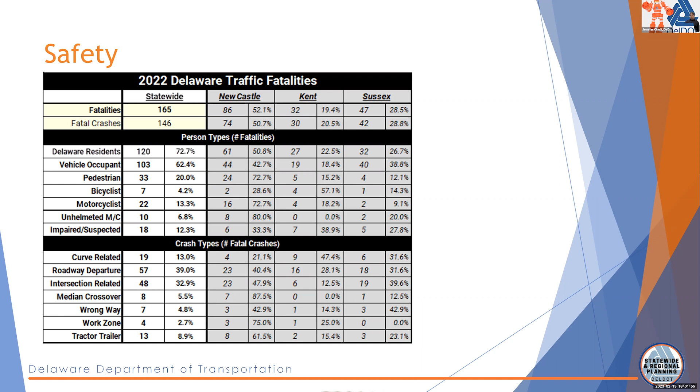Next slide. So, oh, we don't have updated ones. It's summer 2022, I think we saw this last time, so let's go ahead to the next one. Oh, this is the map. Okay, so 165 fatalities in 2022.

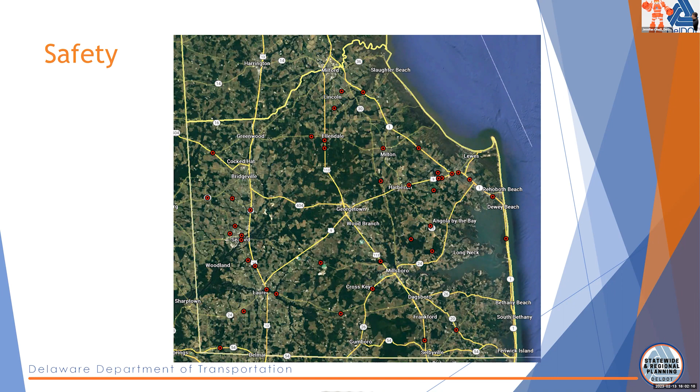As you can see, we have the segment that we're discussing tonight, which is Route 9 between 113 and SR1. Some clusters of fatalities in that area. So heartbreaking, it's really getting worse. 2023 already we have 11 fatalities.

It's starting to hit closer to home for me. I'm getting notifications of friends and families that have lost loved ones. Milton lost a young person due to speeding on a bad curve in the road. It's tragic. So please, seatbelts, tell people to stop speeding. No one's life is worth having to get there faster. I still can't understand that concept. I just get out of everybody's way because I'd rather just get there alive.

So am I done? Yeah, so that was Andrew's turn. And I wanted to throw in real quick something of note: I really want to thank you for being here, especially for those Eagles fans from last night. Sorry for your loss, it was a really good game, maybe next year. So, Andrew. Wow, that's my lead in.

Go Birds, appreciate that. But just following up on what Jen said regarding safety, when we bring a group like this together, spend some time with you, create these working groups, these committees, whatever you want to call them, they do serve as a conduit for us to get the word out to the people. We can only do so much just us talking, but we feel like by the fact that there's 10, 15 of you here, that message spreads regarding safety. So that's one of the reasons we like to do this. We hope you'll pass that along to anyone you might know.

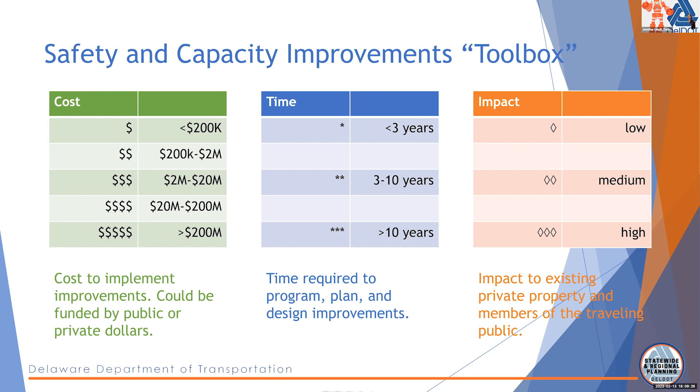So you're well aware of those impacts. As we went through our toolbox last month, we talked about how different improvement types have different costs.

At the network level, we could build an entirely new road, and that could really help alleviate a lot of congestion issues, but it's going to take a lot of time, be very expensive, and have a lot of impacts to private property owners. You all get the idea.

So these are our network level improvements: new roadway, new interchange or grade-separated intersection, similar to what is being constructed out on 1 and 16 right now. You could realign a roadway. Some of those projects we'll be hearing about a little bit later, where you can align, especially an intersection, for improved flow.

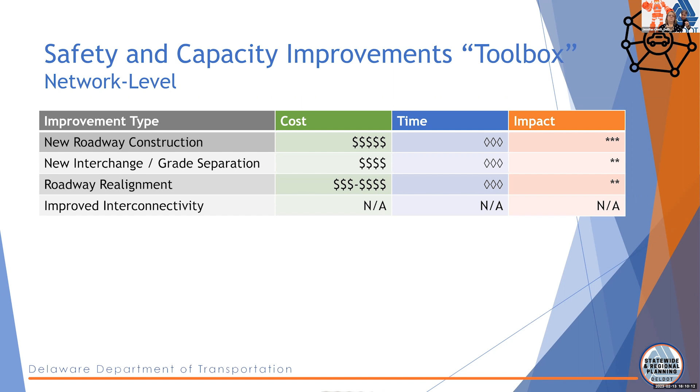And just broadly improving interconnectivity. We talked about that last time as well, especially interconnectivity for people who are traveling maybe by bike or by foot, as well as by car.

So at the roadway level, one of the top things we look at is widening a road. You can take a road that is currently 2 lanes and look at a 3 or 4 lane section. That is really something we're going to be getting into this evening a little bit with 9.

As many of you are aware, the department is starting to widen 9, close to 1. So how far that widening needs to happen is something we really would like to talk with you all this evening.

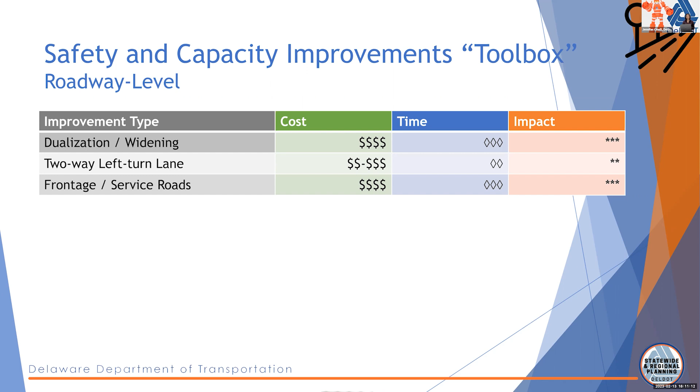So again, those are some of our roadway improvements. Lastly, at the intersection level, there are actually a lot of really quick and efficient ways we can improve safety and capacity, things like adding a right-hand turn lane.

So instead of someone slowing down in front of you to make a right, they can actually get out of the way and allow free flow traffic to move forward. Same with left turn lanes. And of course, things like all-way stops when necessary to allow cars to get across the roadway.

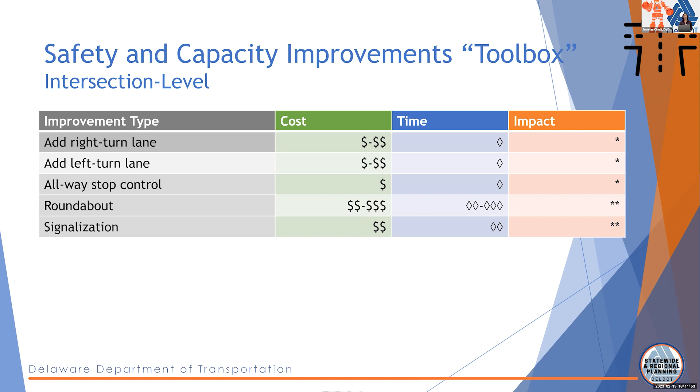Roundabouts, I'm sure we all have lots of opinions about those, but it's definitely a tool that improves safety. And also signalization. So these are, when we look at a corridor, our tools in our toolbox that we look at. As we walk through Route 9 this evening, we can keep all of those things in mind.

So with that, Steve's going to talk a little bit about some of the traffic issues on 9 right now. Give my standard update, I apologize. I'm just a little hoarse getting over a cold, but I'll do my best here to project.

So looking at, as we started on 16, we'll look at the AADT traffic, starting with sort of the base estimates from the DelDOT volume summary, right around 15,000. Taking extra data, recent data from counts and from the StreetLight big data software, we've honed in a little bit those numbers, a little bit less on the Georgetown Harbeson area.

However, we have reason to think that those might have been impacted in 2021 by the ongoing construction at Sand Hill Road and Airport Road. So we're sort of willing to say that it's probably around 15,000 per day demand, no real significant adjustments to the DelDOT volume summary there.

One big difference here is that the seasonal factor is only about 5 or 10% extra traffic over that 15,000 in the summer, whereas on 16, remember, it was up around 30% increase to the daily traffic in the summer.

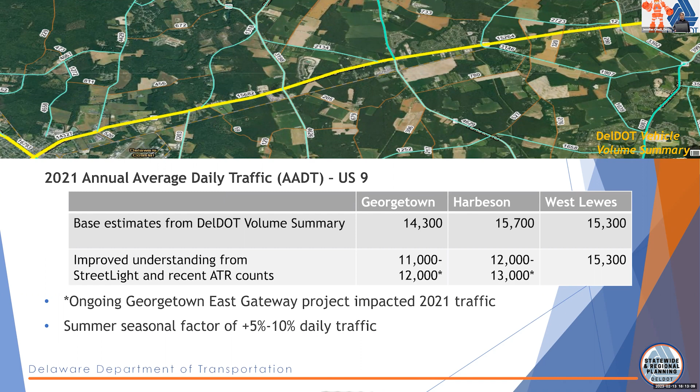A couple quick checks of the origin destination data, again, to sort of compare to 16, show how this corridor is a little different, make sure we're all on the same page with that.

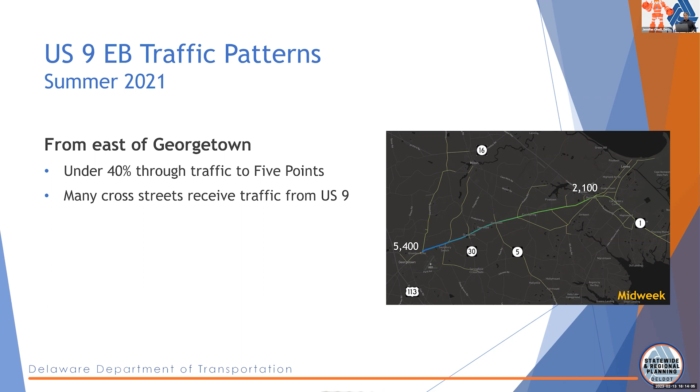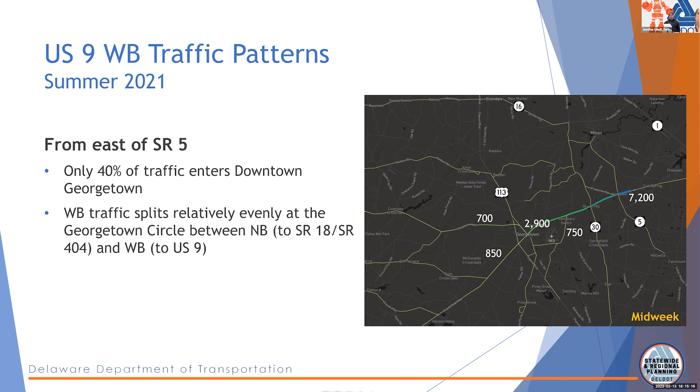So just the general traffic patterns there - this is not a through corridor. There are people destined for places along US 9, for the towns and side streets along US 9.

So again, basic summary: we're talking 15,000 vehicles daily, which is more than we were talking last month on 16 - or 50% more. Thankfully, the increase in the summer is not as much as we saw in 16, but it's still something notable - still a little bit worse in the summer.

And with growth and development, we're going to be looking at daily volumes approaching 20,000, which again, from the first meeting, is sort of the common threshold we used as we might start to need to consider dualization. That's based on a lot of other factors and analysis too, but it's a threshold to keep in mind.

The other thing we're going to go through, as we bury more of this analysis into the west-to-east travel, is that the signalized intersections are essentially built out here. Think back to 16, where you have 30 and Route 5 with basically no turn lanes - they're two-phase signals. We'll show you aerials - every signal along US 9 has left turn lanes, has bike lanes, on all approaches.

It's not just along US 9 - most of them have right turn lanes too. So some of those toolbox items where we could consider improvements, like what we're considering on 16, maybe improving some of those signals in different ways - they're not really an option here. They've already been done on US 9.

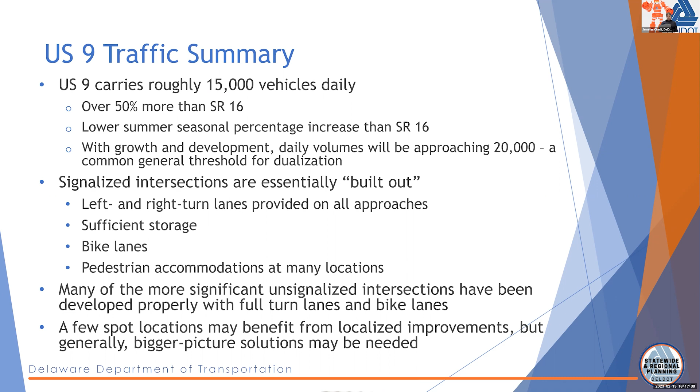And to get into this, we did some further analysis on these intersections that we didn't show you on 16. I'm not going to read all of it - there's a couple of slides here for your own reference, but it talks about level of service and how DOT planning uses that to figure out what needs to be done, or to rank alternatives. We assign it a letter, A through F - most of you've probably seen that. Obviously you don't want to be F - F is your overcapacity, delay is horrible.

But what else did it say? There are other important traffic performance measures we want to pay attention to as well, like delay, queuing, and bike level of stress, which is new but big in the department these days.

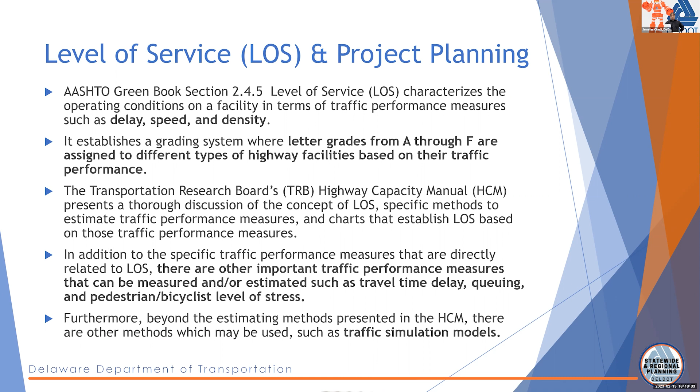Closely related to capacity, volume over capacity over one is generally LOS F. We try to stay away from E, but it's not necessarily going to tank a project if it's the worst case peak.

I think historically, when we bring level of service data to members of the general public, there's a phenomenon where we all react like, ooh, I don't want to see that on paper. It's just a very intuitive reaction to levels C, D, and E. And I apologize for not saying this.

So if we can come up with a graphic - yeah, FHWA has a really great graphic, because when you hear F, you automatically think it's a failing grade. But when you see the number of cars and what that volume looks like, it's not quite what you think. Let me see if I can retrieve that, just so that'll help inform where we want to be.

And on these slides, we bring in delay, average delay in seconds, which can help paint the picture a little bit clearer, where you can say okay, I'm at level of service C, but I wait half a minute on average at this signal. That's not going to ruin my day, versus something that's 60, 70, 80 seconds delay on average for every car.

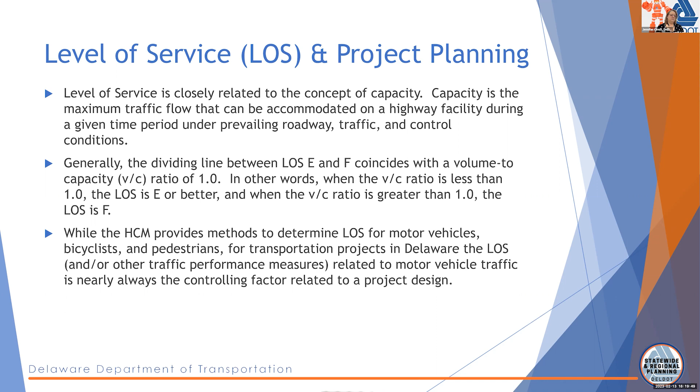And then some more notes for your reference. So, starting our travel across the US 9 corridor, Georgetown area - one of the first things you notice about Georgetown is a lot of ongoing, completed, and planned CTP projects. So we'll give you a brief rundown on what's been done, what's happening, and what's coming on and around Georgetown.

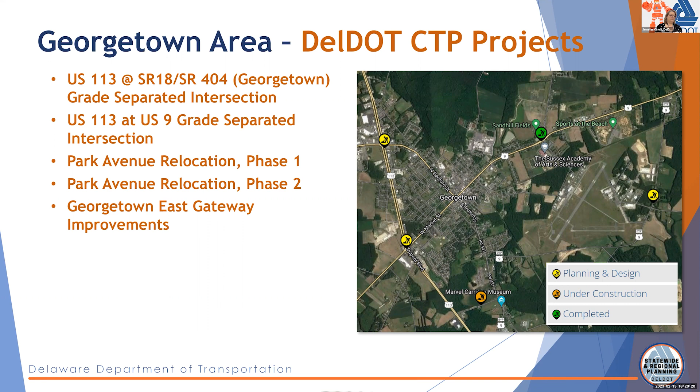First one is the 113 at 18/404 grade separated intersection. I think a lot of you are probably familiar with this. It's nearing construction starting - still technically in design and planning, but those plans are nearing completion and we're targeting a 2024 construction start. It'll be a 2 to 3 year project. So that's a big one.

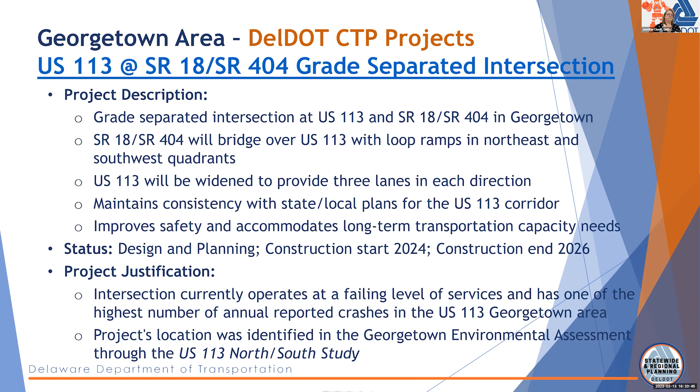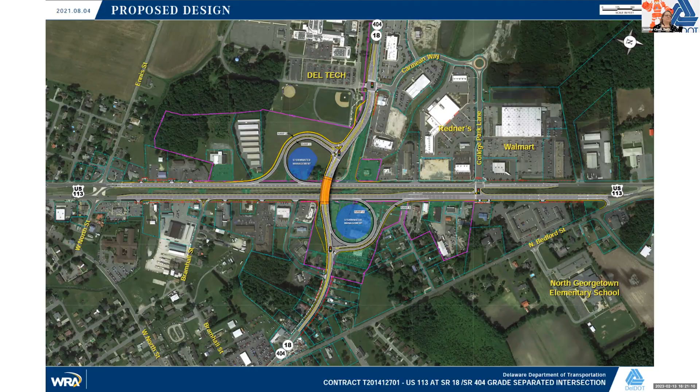Also a grade separation plan slightly farther out in the future at 113 at 9, still in the earlier stage of design and planning. These are all safety justifications - we've seen crashes at these for many years. They've been hazard elimination program sites, and they've been a thorn in many departments' side, and DelDOT's side.

And they've also been identified through the long-term 113 north-south study. So this is just a schematic of the current plan for the 113 and 9 grade separation - one standard loop and slip ramp, and then 9 under 113 with a more diamond interchange on the south of this picture.

Yeah, sorry, I know my voice is - you get to stop now.

Okay, yeah. So obviously the other piece of the picture we want to consider is incoming development. And last month we had really valuable input from you all on incoming development. So we're going to walk through some projects that we are aware of. Jocelyn, you may have some more current updates and we'd love to hear from you on those. So I'll read through the slide and if you want to fill in any blanks, you're welcome to.

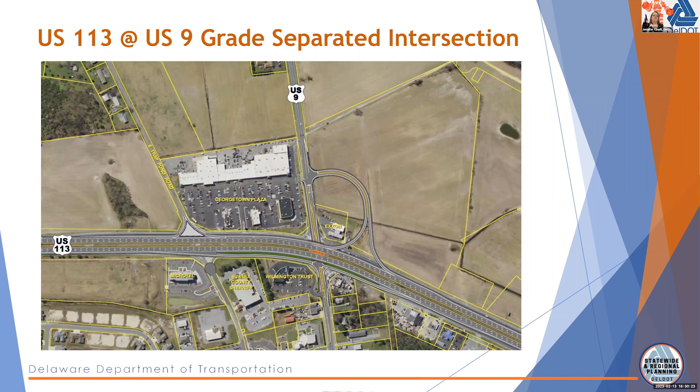Is the Oaks development getting access to 113? It doesn't look like it from the image. I'd say probably not if it's a protected corridor. No, it's off of Airport Road or South Lake. There you go, that's isolated, it's not open.

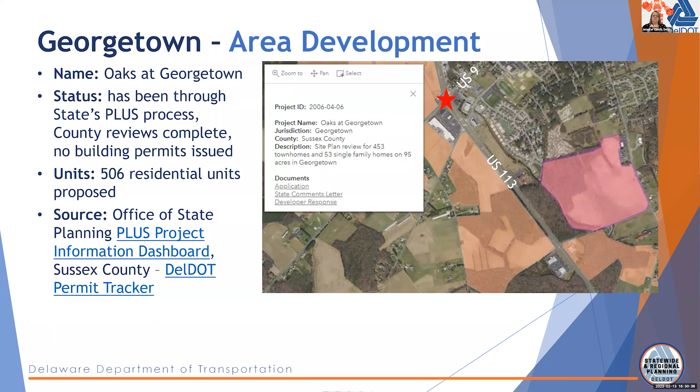With Isaac's Farm, how far north of 9 is that access to 113? They're actually working on the entrance now, right where the commercial is.

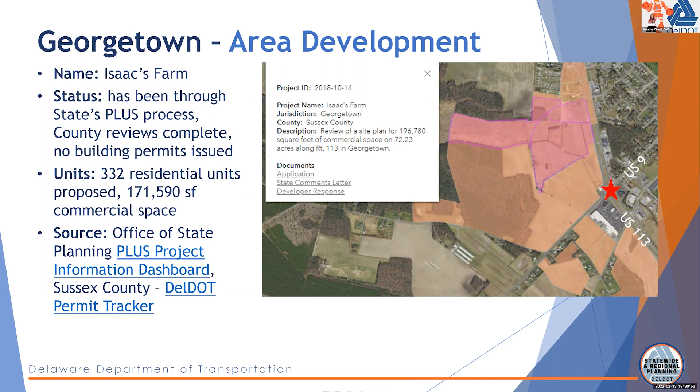So anything else, thoughts on this? During busier periods, are there ways around it, or are you pretty much stuck behind the car in front of you? We're limited there a little bit, but we're open to hearing suggestions for intersection improvements, turn lanes, or whatever else you think makes sense.

If not, we'll move on. I'll throw something out there since I travel it frequently. Heading south before you get to the circle, if we had the room, I would love a center turn lane, because traffic inevitably stacks before you even reach the circle, with people making left turns or someone trying to come out while someone else turns right and lets them through. It takes a lot longer to progress down that road at 25 miles an hour.

Anyone else concur with that? Yeah, that's every day, especially after parade, or first thing in the morning.

Is there a common bypass people take, since it's more of a grid system constrained by railroad tracks and such? Knowing especially that north-to-east connection, is there a standard bypass that gets extra traffic, or do you just sometimes find your way around and sometimes wait through it?

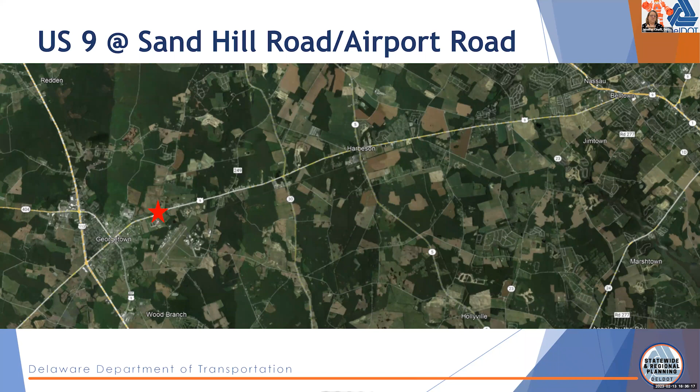Okay, so you all have your 11 by 17 maps. We're going to go to map 2 now, and Steve's going to take us through this area: Sand Hill, East Gateway area. This was a recently completed project that provided turn lanes on all approaches, channelized right turns on a couple of approaches, pedestrian facilities on all approaches, and even a double left turn on the eastbound approach, to prepare for additional future traffic along that movement.

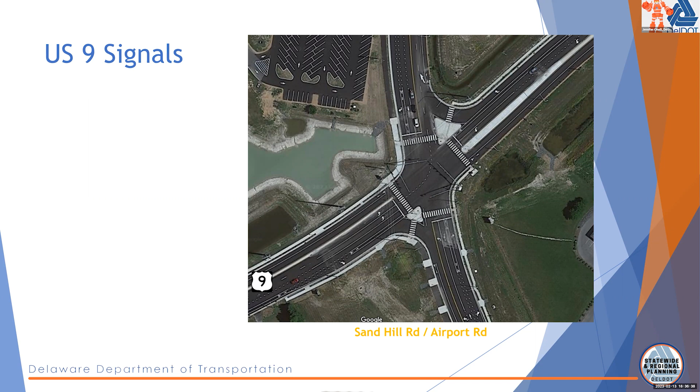The good news there is, based on our current counts and our simple projections -- calling them simple because we didn't run them through the complex model that looks at all the data available at the time and includes projections for development and growth -- we took the estimated 0.6% annual growth along US 9 and applied it to the intersection as a whole. This doesn't take into account specific movements from specific developments, where a TIS would really get into that. This is a more general roadway growth estimate, just to put a number on 2050 and get a ballpark order of magnitude idea of what the volume and resulting delay and capacity might look like. We ran those through the simulation model.

The good news here is it doesn't look like we're going to need to dualize. We're level of service C now with the improvements, and in 2050 we're still expected to be level of service C with not much change to the delay. So no real reason we think to consider dualization this far into the Georgetown area.

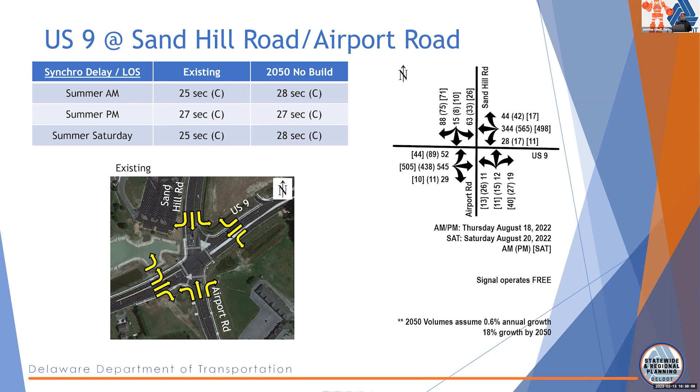Just a refresher on the project -- that's Steve going through the analysis. That doesn't mean when we start discussing it you may not have a different view on that. So again, don't look at it as Steve or any one of us is offering something final. I will just say that intersection now is so much better.

Yeah, we like to hear that. Big difference. I watched it on camera today, and I saw how bad it was during construction. What we do for fun -- we watch intersections being built. I'm trying to solve that school traffic when they got let out.

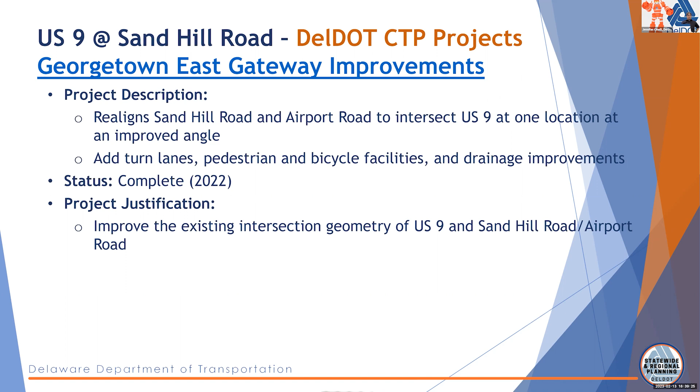As nice as that intersection is, you have homes that exit out into a turn lane. When you look at how wide it is and how many lanes you've got, I'm putting a bus in a turn lane to load kids on, and they see two lanes, and they're getting into the fourth lane and blowing through reds. I understand the need, but when you extend that turn lane as far out as you did into those residential homes, it creates issues I have to deal with. Those bus drivers call me about it.

They're out of luck because they see it change and they're in a hurry, trying to get through. They go around the bus. If the stop sign is out on the side of the bus, because it's three lanes, they have to get all the way to the right into the turn lane, then there are two travel lanes, and one's just going to go left or to the center. Every one of those lanes should be stopped.

That's a good note though. People may need to be educated about that, or if not educated, enforced. Glenn and I were talking about this at the last meeting, how education about stopping, not just for school buses but for emergency vehicles too, has become a problem. I'm shocked at how little people are aware of that. I'm not sure what other states do or why we're so bad at it, but something definitely needs to change. I encountered the same thing in Pennsylvania over the weekend, no one pulled over, I was on Route 30. I think there's some legitimate uncertainty over the laws around four-lane roads and school buses, divided versus undivided highways.

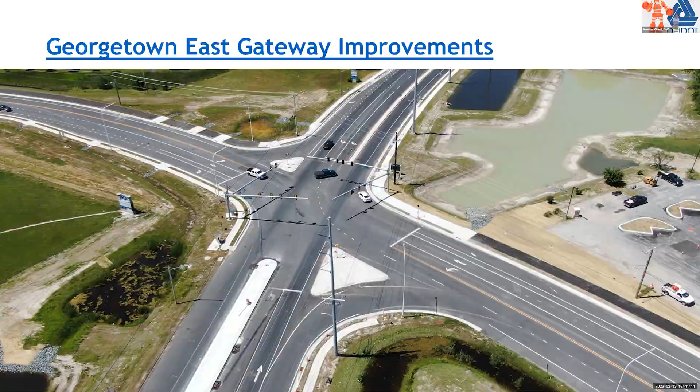Yeah, we appreciate that. So that was a successful project, and there's some development in that area. Getting into area development, I know we are outside of town limits at this point, correct? Just barely, but yes, right on the edge.

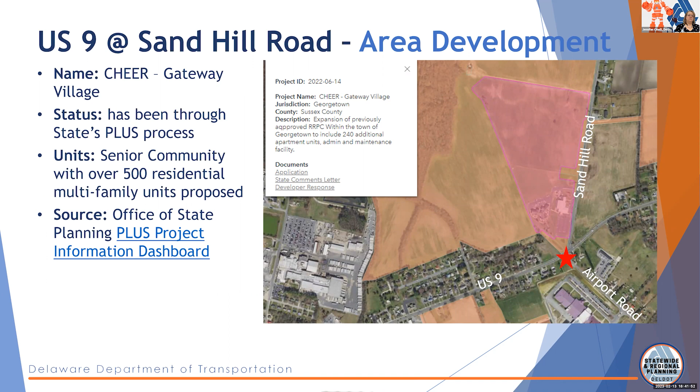One major project coming through that is partially constructed now, down close to the Sand Hill 9 intersection. Some of the senior community has been constructed, but there are plans to extend that development to the north, over 500 units. That's just one more input to that intersection that's going to continue developing as far as we're aware. I don't see anyone from the county shaking their head to tell me otherwise. No, that's definitely still moving. Turns out we're all getting older.

Also, kind of across the street from that development on Sand Hill Road, there's a recreational facility planned, RV campsites, cabins, and some commercial coming in at that location. Is that still the same? It went through as a conditional use. It had been a couple of things, I thought. It was a mixture, it wasn't just campsites.

If they're coming from the east, from 132, will they have to come through the truck route, or will they be able to come through another way? RVs, yeah, that's a great question to figure out. That's certainly something to consider. The reason they chose this location is because it's right across from Sports at the Beach, so they're going to have all the families stacked up there during the events.

They got road frontage at both locations, so at Sports at the Beach you're going to deal with that traffic and the campground traffic. Same thing at Sand Hill Shell Rollers Park, you've got access into there and the campground right across from each other. So to me that points to it's probably going to take folks longer to drive there than it would to walk or ride a bike across the road.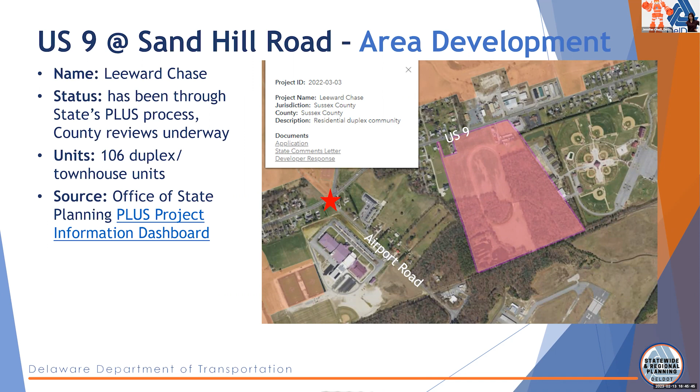So there's Leeward Chase - I knew I had it hiding in here, just a little out of order. And then the last one we had is Greenleaf Place, which is to the east of Sports at the Beach. Another senior community, with maybe over 100 single-family units proposed currently. Yes, there are homes along that small street extending down there, but this is kind of filling in behind it. Is that correct? Greenleaf Place has been through already too, or no?

It just came through - the new one, you've not seen it then probably. Okay, so this one has been submitted to the state, but sounds like the county hasn't heard about it yet, so we'll keep eyes on it as it goes through the process.

I just want to throw this out there - seeing all this development around Sports at the Beach and the Sand Hill complex, that's a whole nother draw, right? This isn't the beach anymore. I mean, this isn't gonna just be the travelers heading to the beach - this is now going to be here every day, especially during the summer, when all the soccer camps and field hockey camps and lacrosse camps are going on. Isn't that what these fields are hosting?

So keep that in mind too - what does that look like? Yeah, the school buses are off the roads, but how many people are actually in Georgetown now? Georgetown looks very different than it did when I was working in the State Service Center in 2006 to 2011. As soon as I left, I went to DelDOT - everything changed down here.

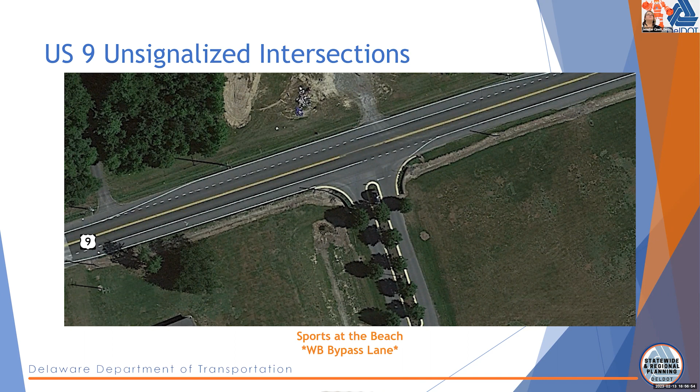Yes, and Pete Townsend is across from the campground. I just think there's a problem with the kids in both places, right? There's a problem with the big rigs getting around. If there was any way to kind of grid that system out, so that if you are playing soccer and baseball, you don't have to get on Route 9, you only have to cross it to get to Pete's and to get to the shelter.

So all that woods is kind of already predestined. They run through there. And that is a challenge- we can discuss it, but the longer we discuss it, the less opportunity, property is going away. Because it's on paper, right? Which one? The one across Route 9 that's in the woods- they haven't. Yeah, they broke ground on that already.

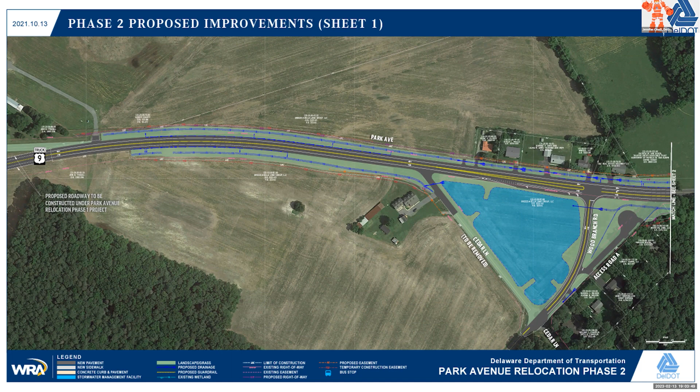At a prior meeting, somebody asked about this triangular intersection. So this shows the plan for the Wood Branch, Cedar Lane, Park Avenue triangle - they're going to cul-de-sac off one of them and realign the other so it's not skewed anymore. It won't be signalized, but you can see we're providing a bike lane and left turn lane there, which should be an improvement. And then this is the big picture at Park Avenue and Sand Hill Road.

Providing turn lanes again, to try to prevent people from bypassing via the shoulder. Who's going to do it, who's not, who's going to decide to do it in the middle of the queue and hit somebody in the shoulder.

Shingle Point, sorry, here's a close up on Shingle Point. Similar improvements to Park Ave, though we're still not signalizing this one yet. Traffic demand isn't quite what we see at Park Ave, but there are still some significant improvements to that intersection as well.

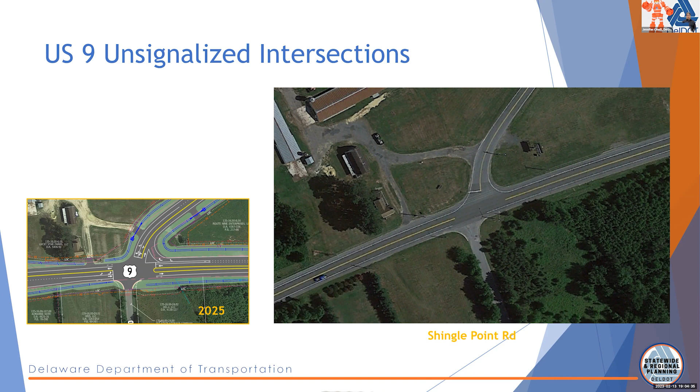I have a couple of these unsignalized ones as we go by, showing that developers did the right thing here. It's a big development, and they provided the improvements along US 9 that needed to be done. So, thumbs up to them.

Any other discussion, thoughts, or improvements for Park Avenue? Glad to hear some of the incremental tweaks are helping. That's something the traffic folks really care about. If you notice one day things are off, you can get in touch and there can be real-time adjustments made. So thank you to those of you who reach out. We don't always get the positive feedback, we get the negative feedback.

Any other suggestions? There's already some investment going on there, and I think what that investment allows is that when a signal is needed, you've kind of got the infrastructure in place. But certainly looking for anything else, any bike-ped suggestions, any other safety or intersection type suggestions?

For the trail, I didn't look at the schools. But the trail, I was just looking up the map because I knew the trail had come in. It only gets to Airport Road right now, but it's going to run along the rail coming out of Georgetown, and then finally make that last connection.

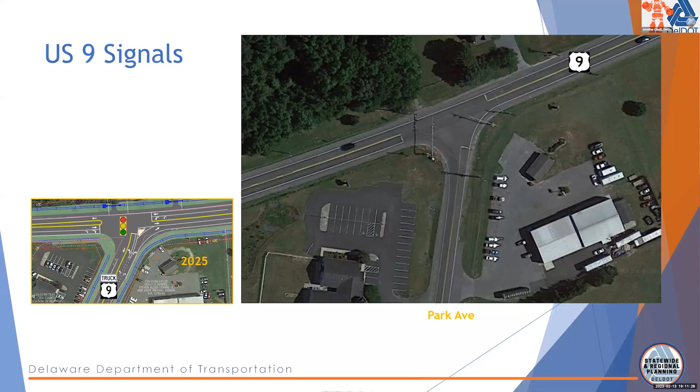Pam, do you mind, just so people at home can hear you? Specifically with development coordination, since I manage that section as well, we take every effort to explain to developers that the first choice is to take their entrance off of the lower volume roadway. So if they're at an intersection where they abut Route 9, we would very much push and recommend them to take that access off the lower volume roadway. There's just not a ton of cross roads to be able to access, so if the only option is to get off is from Route 9, they have to get that access. Just an FYI, that is what we try to do—to help the distribution of traffic. Ultimately you have to provide access, but if you can provide it to the lower volume road, that's your preference.

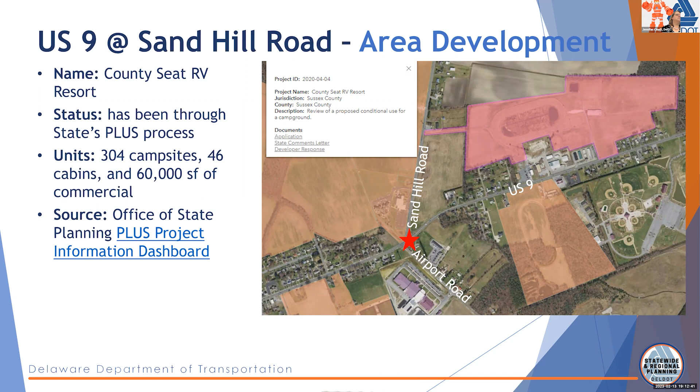Correct. That's when you look at a parcel that has something like this coming off of it—that's part of what results from that negotiation. That's a fair way to qualify it. Yes, and a fair amount of times a lot of the parcel gets to drift off like that. So if that was a whole parcel, we'll split the parcel and do commercial in the front, and then they'll do more residential stuff in the back. We do make them put as much multi-vehicle access along the front as possible for their parcels. So we do try to make them adhere to their fair share as much as we can.

So Glenn had a question. I'm just curious, has anybody been documenting or looking at the numbers, trending development movement here post-pandemic versus pre-pandemic? A lot of the brick and mortar—a lot of people are no longer here just seasonally, they're here full time. We've already seen that, we've already seen those numbers. Curious if that's one of those things being monitored. It's hard to monitor, so I think we're all hearing it anecdotally. As planners, we often look to the census and the ACS, which release yearly data and 5-year data. That's not fine-grained enough to get at that phenomenon often. So we're really relying on traffic development applications, but whether people live here full-time or part-time, some change week to week, maybe they're planning to or then they decide to lease it. It's very hard to keep an eye on, but as you all working in this sector begin to hear more of that, or get a sense for the ratio of homes that we thought were going to be summer homes and now look like folks are here year round, that's valuable for us to know.

And we're having that conversation with FHWA right now. I'm pushing back because after they took the census during the pandemic, when no one was allowed to even be in the state if they were from out of state—then in 2021 is when we really started to see the uptick of people saying, oh, I can work from home, I'm going to go work at the beach.

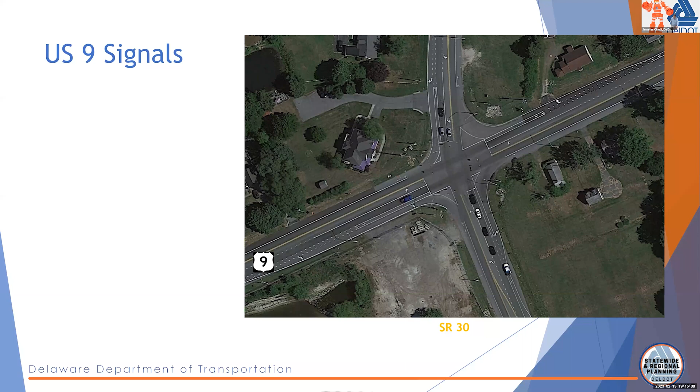It's another overview of the 30 intersection. We've already been provided with left and right turns, bike lanes, etc. Did the Synchro analysis for this one too.

I think some of what we talked about last month, where summer Saturday sees some cut through traffic on Route 30, some significant increase on Route 30, sort of brings the delay on summer Saturdays a little bit higher. You can see if you really look into the volumes, that summer peak on 30 through traffic is pretty high.

Growing the volumes to 2050, still AM and PM, we're looking at C's that are getting really close to a D for over 30 seconds, but then the Saturday, again, we're at a pretty high D. We're talking 40, 45, 46 seconds delay for some average delay that ever shows up with that signal.

Because that's caused by the 30 traffic, dualization may not save us as much time during all these peaks. So this is just to give you some perspective on what dualization would buy us, if it's something we should consider here, or maybe other improvements, like finding ways to accommodate traffic on 30 or keep traffic away from 30 to prevent some of these higher delays, even though they're not at that EF really concerning level.

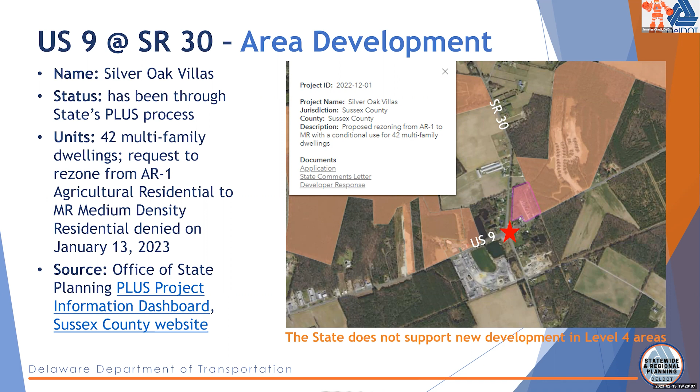Obviously, you can have just as much traffic impact from a high density development as a single family home, depending on how many units you're fitting in.

I'm sure some of them already have folks on. Yeah, that was phased as well, I believe. And then north of that,

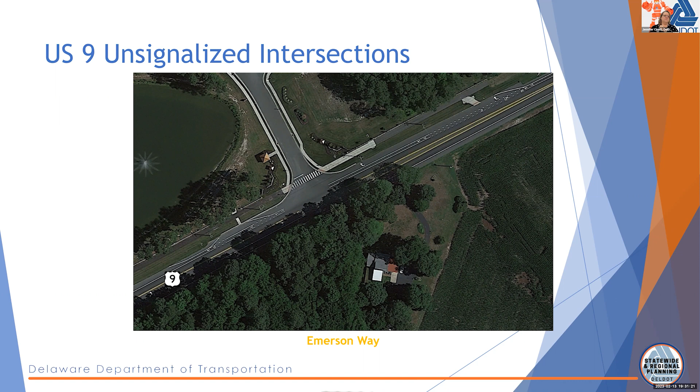Well, let's move on to the next section. This is just another unsignalized intersection that has some improvements. This is probably the critical signalized intersection we wanted to get into - 9 and 5.

As you can see, we did do a recent project here. We provided the left turn lanes but were unable to provide the right turn lanes due to space constraints. Specifically, there's a cemetery on the southwest corner, and there's a bridge - a river or stream of some sort - that's constraining the west side.

You can't really see it as a bridge, you probably don't experience it as a bridge, but there is a structure there that you're driving on.

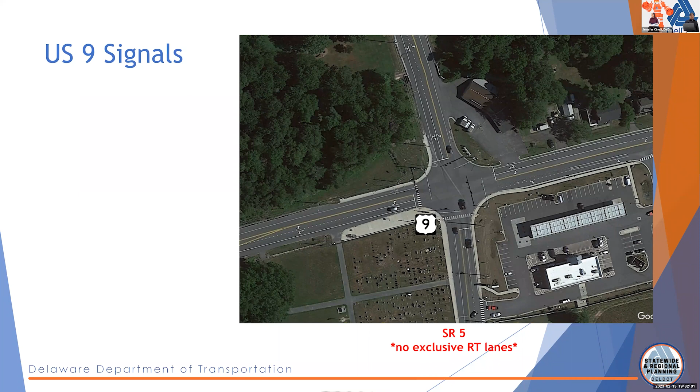So here's finally some values that jump off the page at you. Right now PM is the critical peak, more so than AM and even Saturday. We've done queuing observations and gotten complaints from nearby businesses in our traffic monitoring. Growing the volume to 2050, we expect almost 80 seconds of average delay through this intersection, which is not great. Dualization here would provide pretty significant benefits - getting an extra lane through here - but this is one of the biggest physical constraints to deal with on the whole corridor.

So that would be a pretty in-depth study and discussion, figuring out how to make that work if that was something we wanted to look into. Maybe there's other ideas or things that could be done as we go through this. Let's talk about the development first.

Phase 3 of Beaver Creek built out - that's been a big change in that area recently. I just wanted to highlight that. So really, anything else in that area - I know you have a commercial property to the southeast, right? Pretty near Route 9 here.

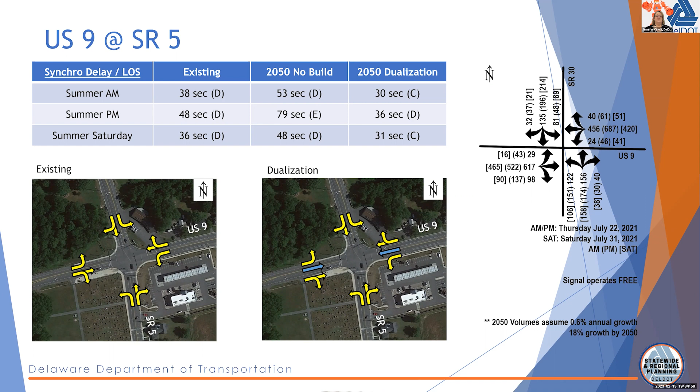Pretty much locked out. When it's getting built up, it's pretty hard to find 200 feet, when you continue to kick the can down the road looking for that magic number. But that magic number might no longer have the ability to be created, since there's a neighborhood coming in that could potentially build on it.

Or has talked about realigning a couple of roads that might actually work in that area, at 9 and 5, isn't that where it is? There's no development over there. Shouldn't be. Where's Cool Spring? Am I too far west? Too far west, I'm sorry, never mind, disregard that.

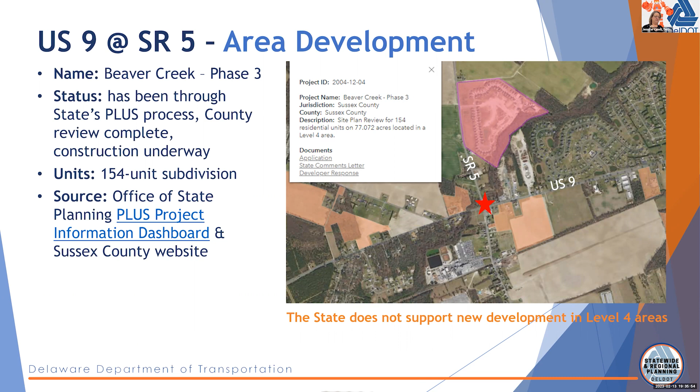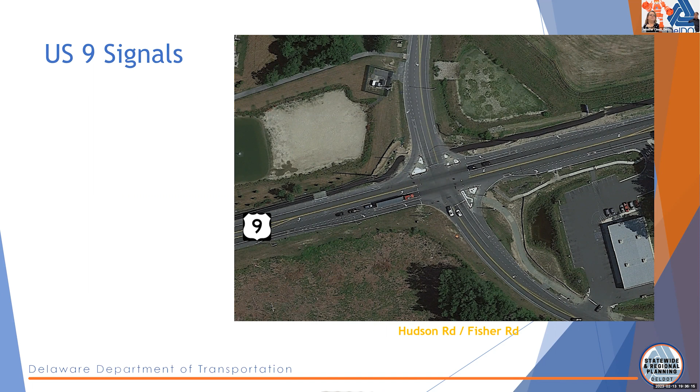Fisher, again same thing, improved once already, looks like there's ongoing work, at least the area taken, they're doing some improvements here, probably associated with the trail. This is the trail project, they're extending the trail to the design limit. They are still seeking funding on that, so it's unfunded at the moment, but the department is very committed to the Georgetown-Lewes Trail and is actively pursuing grant funding.

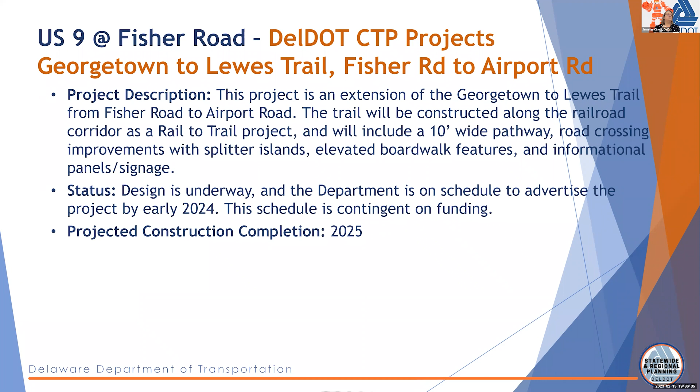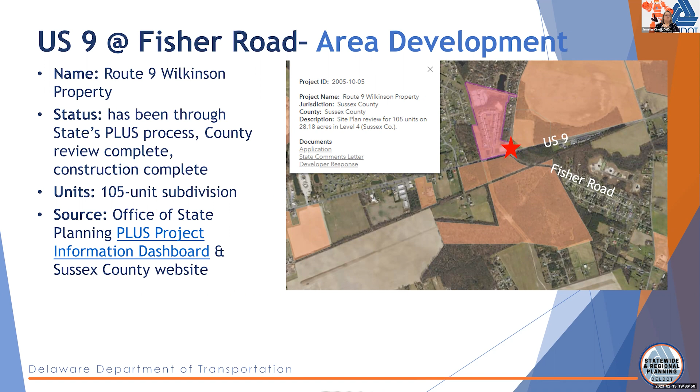So obviously we all are aware of the large amount of development coming in this general vicinity. There's the Route 9 Wilkinson property, a 105 unit subdivision. Also the Fisher Road property, a 264 unit subdivision. And then the big one, Cool Springs, with residential, mixed use, and commercial development, you can see the vast size of that one.

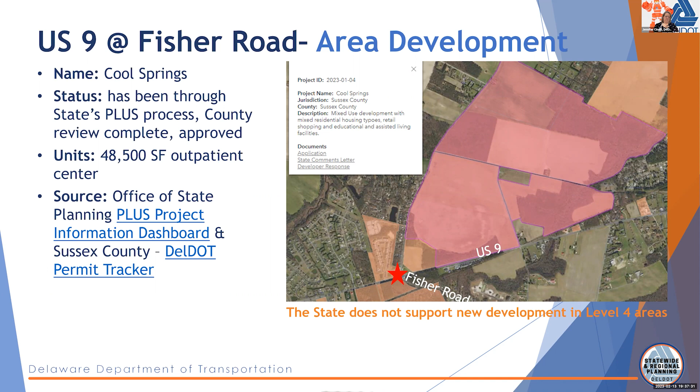In addition to the Fisher Road intersection, there are 2 unsignalized intersections to the west. We just want to call those out, as these are one of the only 2 sort of medium-sized cross streets that don't have the improvements we see at a lot of other places, like turn lanes or even bypass lanes. So these may have potential for spot improvements in the future, including traffic safety. I don't know about the demand, we don't even count the size right here, so this would probably first go to adding left and right turn lanes.

I would have to look at the volumes. Does anyone know, what's your experience at these locations, are they problematic? It's not bad right now, but when you add 2,000 houses, that would come through the TIS, they generate the trips from their huge development and route them, and if they had a significant number, the analysis would show that these now fail. They need some improvement.

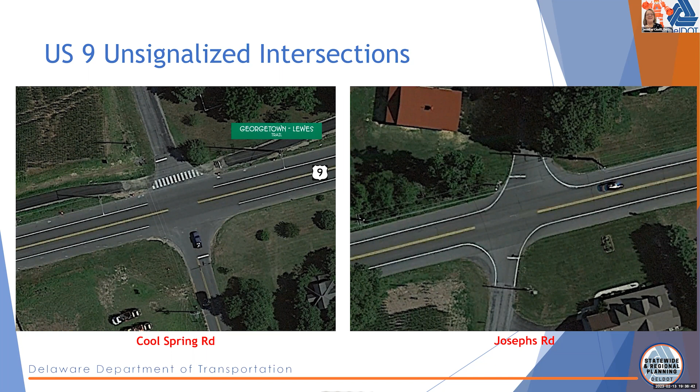The area for the bike trails coming there, they're little parking lots, a 1-person parking lot for the bike trail. And my ask was, don't put Chick-fil-A on Route 9. That was my ask.

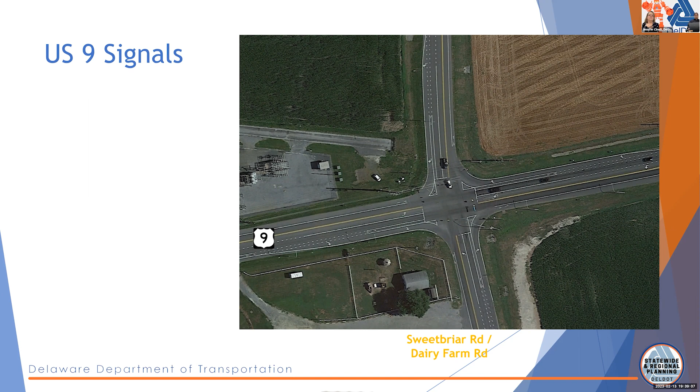Right, so moving on, this is the next signal, Sweetbriar Dairy Farm. A lot of improvements to this intersection over the last 5 to 8 years. Realigned Log Cabin Hill Road up to the north and made the sort of capacity improvements we've seen common to the other signals along this corridor. Providing the numbers here as sort of the point between the Route 5 and Lewes area to the east, that is already being widened to 4 lanes.

As a discussion point here, what widening might look like, how much delay that saves us. Here it looks like actually the AM is the controlling peak, and we do get up over 45 seconds in 2050, which again still is not, like Pam said, New Castle levels of scary, but it still could be a frustrating drive, especially combined with all the other 45-second delays you might experience and all the cars you're stuck behind.

You can see under the aerial photo, in the current CTP, DelDOT is planning to dualize Route 9 through Old Vine, east through the new Nassau Commons area. But there have been very preliminary conversations about whether that needs to continue extending down to this point, or even further west. That's part of what we want your feedback on.

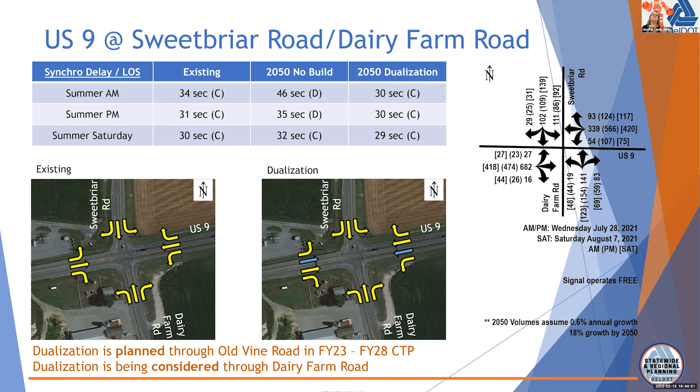I'm not trying to put you on the spot, but with the trucks you have, what are you telling your truck drivers about Route 9? What are you hearing from your drivers about driving on 9 — do they avoid it? They veer right off of 9, so they can only do it to a certain point. Obviously, they hated it in the summertime.

You know, for our business, the trucks can't sit still. Because of the cargo we're carrying, they have to be constantly moving due to temperatures. So a lot of them will take back roads to avoid congestion within cities. Homeowners aren't real happy with that because we got trucks flying down back roads that really probably shouldn't be there, but we'll see alternatives settle around.

Right, it's a similar discussion with emergency vehicles. Yeah, you don't have a choice, you gotta get where you need to get to. You're gonna do what you have to do, but if somehow Route 9 could accommodate your trucks, you'd probably just assume a straight line. They would love to stay on 9 versus the back roads. Okay.

Let's finish up here, Steve. This is sort of the extent of our official project limits. We can talk about the other intersections through here. Mulberry Knoll, also a CTP project, recommended by the 5 Points Working Group. It will include extension of Mulberry Knoll Road from Cedar Grove to US 9 and Old Vine. You can step back to the map. We're missing including an image, but essentially Mulberry Knoll Road as it stands is down here, and it would basically be continuing that through all the way up until 9.

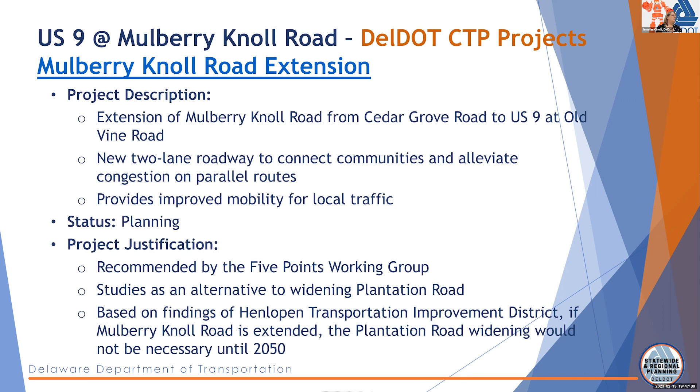And all the way at Old Vine Boulevard, we have the widening project. So the widening will carry through Old Vine, there's a new signal in operation there, I believe. And we will have officially 2 travel lanes in each direction as part of that project.

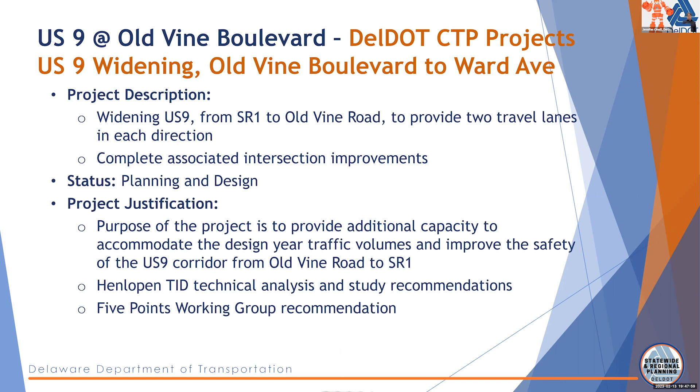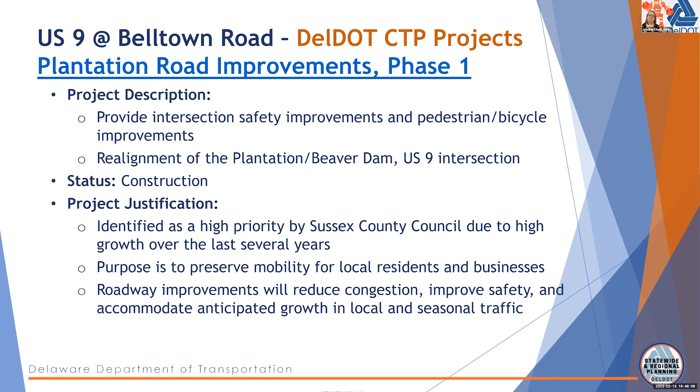But the really big piece too is if you are heading on 9, instead of having to come down to 5 Points, you're going to be able, if you're southbound, to peel off where the hardware store used to be and continue on your way. So that is going into construction pretty much now, working with the contractor to alleviate impacts in the summer months, but that's incoming.

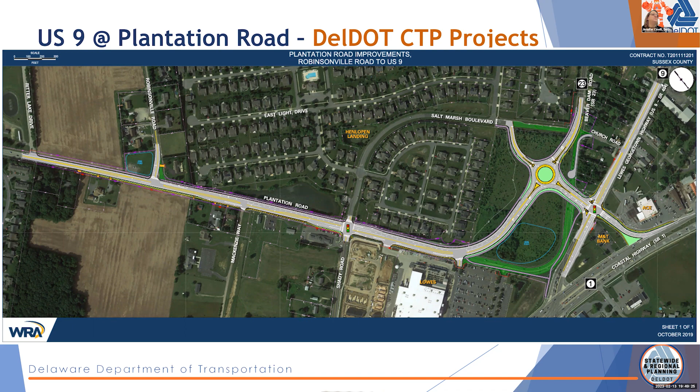Gotcha. Eventually, as part of the Henlopen TID, the plan is to connect that. There'll be a signal at Nassau Road now, and part of that road is going to be dedicated to DelDOT for public use, per the Henlopen TID, which the county and DelDOT signed in 2019.

Will those signals all be interconnected? Oh yes, absolutely. And if you've ever met Gene Donaldson from our TMC, he's brilliant. He watches those signals like a hawk. I just picture him every time I'm down there, sitting on top of those signals, watching what's going on.

I'm going to wrap this up a little bit. We've heard a lot here, even if it may not seem like it. Certainly interconnectivity, coordination with the county in terms of advancing requirements and additional coordination. I heard a clear theme of utilizing Route 9, whether it's needed now or will be needed at some time. Let's start working on it now so we can preserve what we can and figure out what the obstacles are going to be. My senior year yearbook quote was, the sooner you get behind, the more time you have to catch up. So with Route 9, let's try to catch up before we get too far behind.